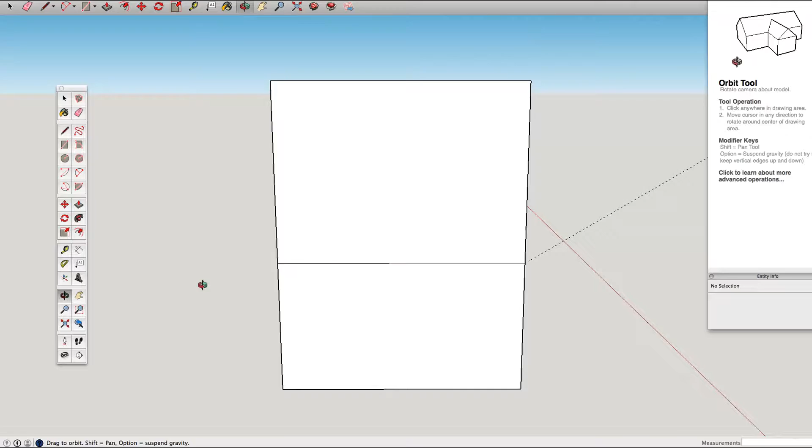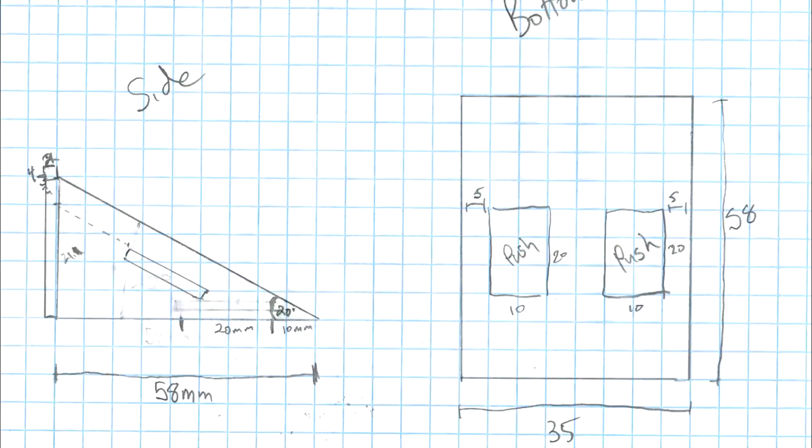The goal of this guide is to quickly show you how you can plan out a model, use CAD software like SketchUp to design the model, and then 3D print it to bring it to life.

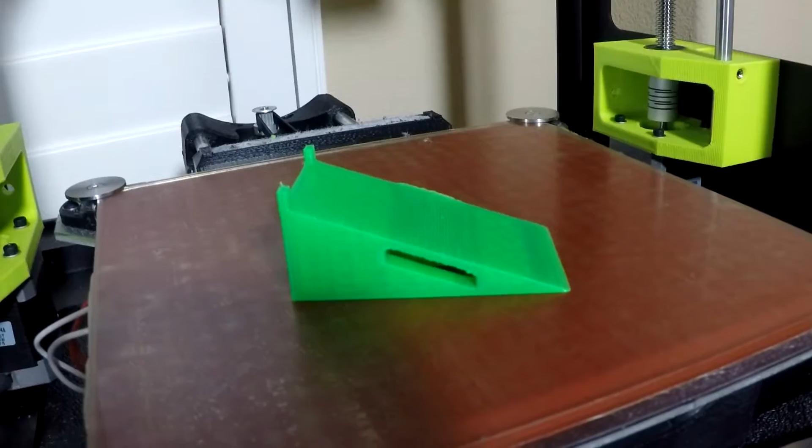Today we're going to show you how you can quickly design and model an angled wedge for an action camera to put on your quadcopter. While many quadcopters on the market today support using action cameras, very few have angled mounts that will match the angle of your FPV camera.

Now in a real life scenario, you would want to print up a protective case for your camera, but that's definitely a more advanced scenario than what we want to cover today. For the sake of this video, we're going to assume you just want a wedge mount to angle your action camera to match your FPV camera.

We're going to keep the design simple. In effect, we're going to be creating a 20-degree wedge that has an opening for Velcro to wrap around and hold on to the camera. We're also going to include a front brace to prevent the camera from sliding off, and openings beneath the wedge to secure zip ties to the camera plate.

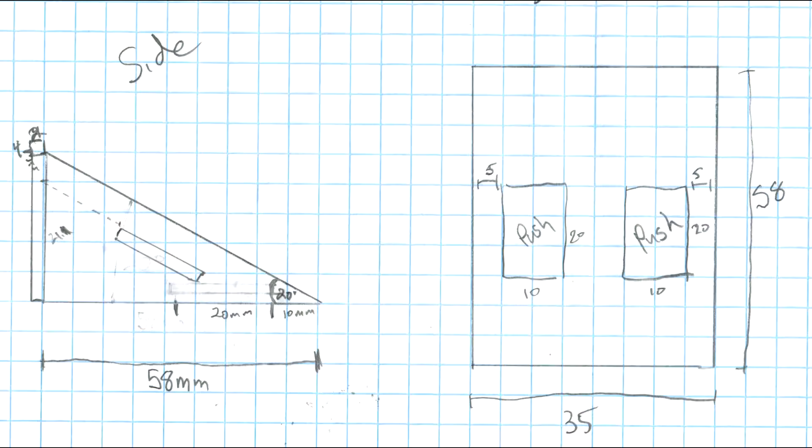While this is a simple design, it should allow us to use a wide array of features offered by SketchUp to get more comfortable with the application.

Diving right into SketchUp, we're going to create a simple rectangle using the measurements that we sketched out on our pencil and paper design. To do so, we're going to select the rectangle tool and type in our measurements.

Now we'll use the push-pull tool to create a large block. From here, we can use the protractor tool to select each side of the base of the block and set a reference angle to 20 degrees.

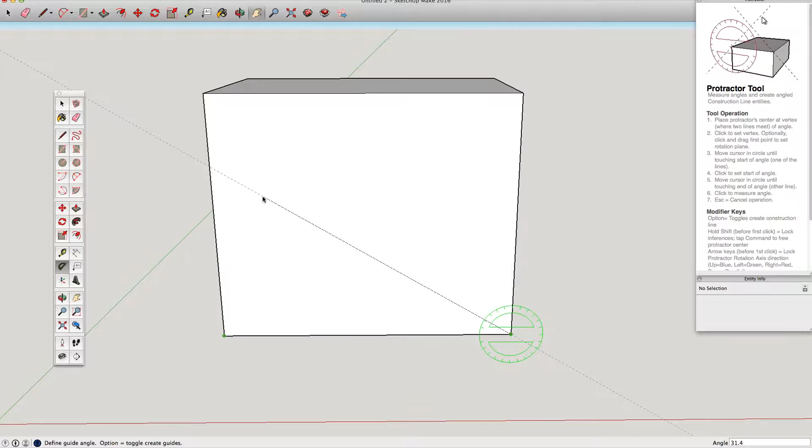With these reference points in place, we can then use the line tool to trace over the reference. If we continue this around the entire block, we can then delete the unnecessary faces and lines and come up with a basic wedge. In about a minute, we were able to create our angled wedge from scratch, but obviously we want to add a few more details.

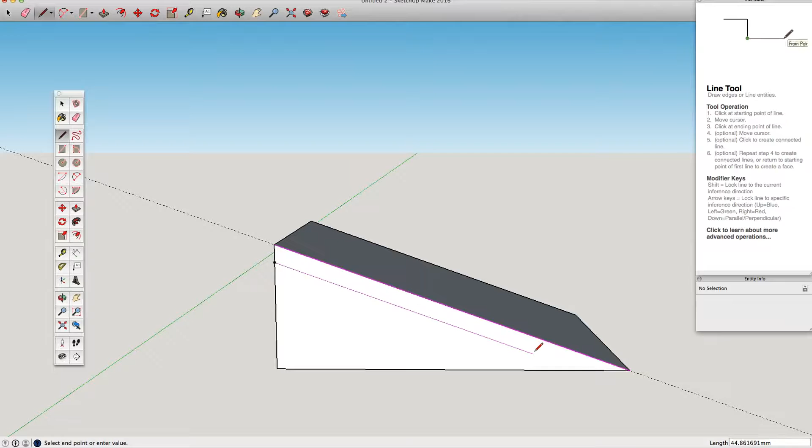For the Velcro strap holes, we're going to measure slightly below the top of the wedge and draw another line parallel to the wedge angle. Then we're going to draw connecting lines to make our gap.

Finally, we can use the push-pull tool to push out the face we drew towards the opposite end to create an empty space. Similarly, we can use the push-pull tool at the front of the model to create some guards to prevent our run cam from flying off the front of our quad.

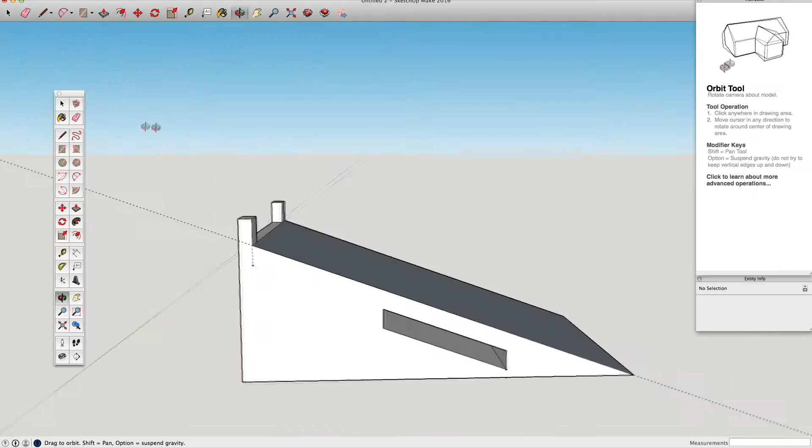Now for something a bit more challenging. Now that we have the camera secure, we need to get our wedge attached to our quad frame. Since we added the Velcro straps for the action camera, there isn't a whole lot of room to add another gap parallel to the camera plate.

Similarly, with the vibration damping balls on the ZMR, it's going to be a challenge to mount from the side. Luckily, the camera plate has openings on the top, so we can mount the wedge to the plate from underneath our design. To do this, we're going to need to see through the top of our wedge in order to create gaps to run zip ties through.

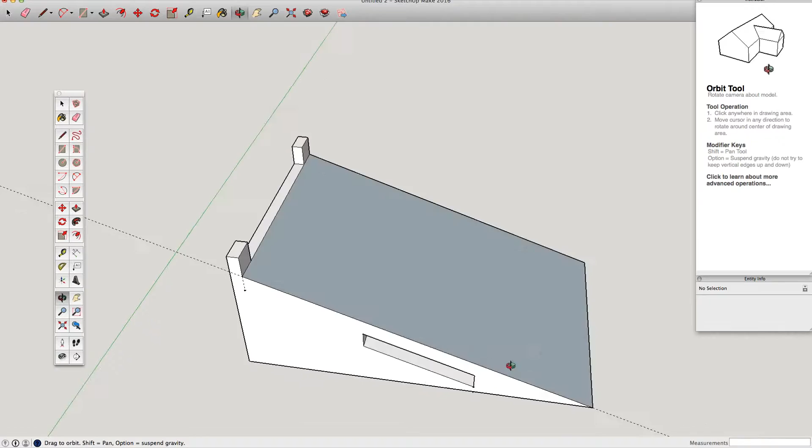Since we already cleared out an area for the Velcro straps, let's put our access points there.

Using the section plane tool, you can easily adjust the camera to see through different parts of our model. We can move the section plane just beneath the surface of the ramp part of the wedge to draw on the exposed surface. However, this presents a new challenge.

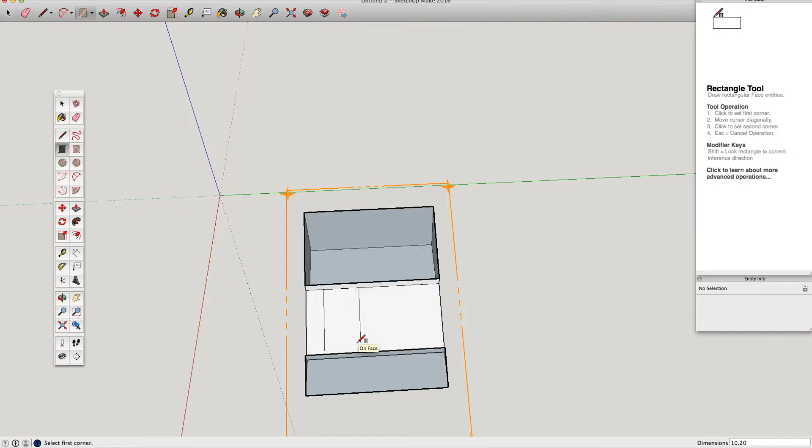After we draw our new cutouts for the openings, we can't just use push-pull to create a new gap. This is due to the angles not matching between our Velcro holes and the base of our wedge.

One solution to this problem is to delete the faces that we cut out and use the line tool to fill in the gaps. Remember, at the end of the process, the model needs to be whole in order to be printed. Use the line tool to create new faces around the cutouts.

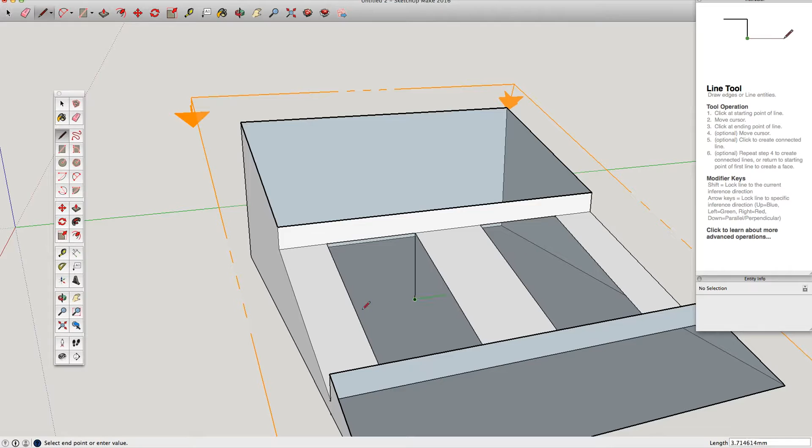Once you complete drawing a square, you'll notice that a new face appears. Once complete, we can delete the bottom face and our access points are complete.

At this point, we're done with our base model. You can export the model for printing or for sharing with friends and other pilots.

If you need more information on finding a place to print your model, check out our 3D printing article on Propwashed.com for additional information. Hopefully this helps cover the basics of using SketchUp and gives you some ideas for creating custom parts for your quad.